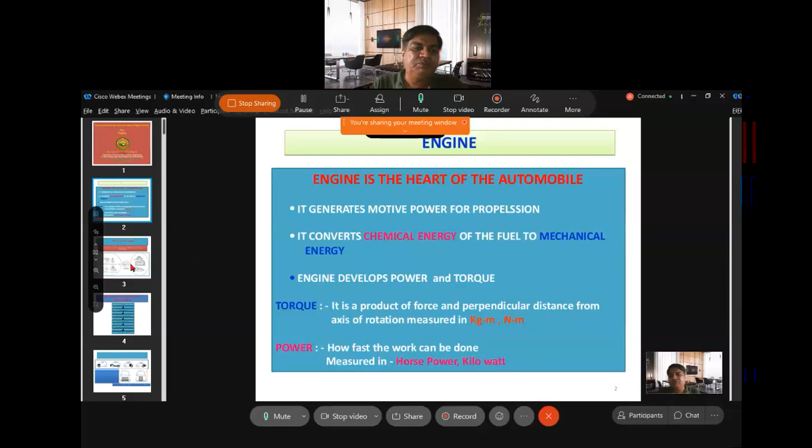Now, what is an engine? Engine is a device that runs on its own by changing energy from a natural source, such as fire, wind, or electrical material, into mechanical energy continuously.

So basically input energy is provided to the engine, and correspondingly you get output energy. Input energy may be electric power - now electric vehicles are coming into the market, which convert electrical energy into mechanical energy, and the vehicle moves forward. Similarly, fuel energy, water, and wind energy are also conventional sources, and all these will be converted to mechanical energy with the help of the engine. That is the important part.

Next is the flow diagram of how the engine produces power. How does the engine produce power? It will take fuel - fuel may be wind, water, CNG, LPG, diesel, or petrol - and combustion will take place inside the engine cylinder.

Fuel will burn and heat will generate. When heat generates, then pressure as well as temperature both develop, and there is expansion of gases. Expansion means it applies thrust on the piston, and pressure generates. All this burning takes place inside the clearance volume, defined as cc, cubic centimeter.

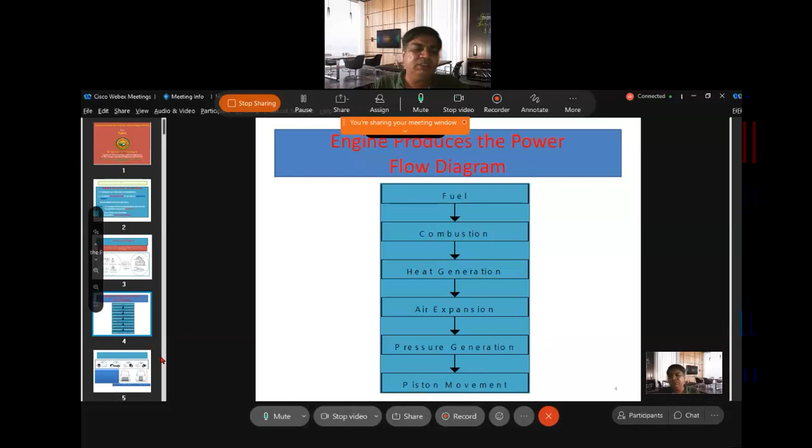Because of the burning gases, it applies thrust, meaning normal force acting on the piston, and the piston moves in to-and-fro motion, that is TDC to BDC, top dead center to bottom dead center. The piston is attached to the connecting rod, and the connecting rod is attached to the crankshaft, and correspondingly the reciprocating motion of the piston converts to the rotary motion of the crankshaft. This is how power is generated by the engine.

Now, engine layout - this is the layout of where we put the engine in the vehicle. It may be front engine, front drive, where the engine is at the front of the vehicle and power is given to the front wheels. Front engine, rear drive means the engine is at the front, and power is given only to the rear wheels, not the front wheels.

Midship engine, rear drive means the engine is in the middle and power is given to the rear wheels only. Rear engine, rear drive means the engine is at the rear and power is given to the rear drive. So the engine may be mounted lengthwise or breadthwise.

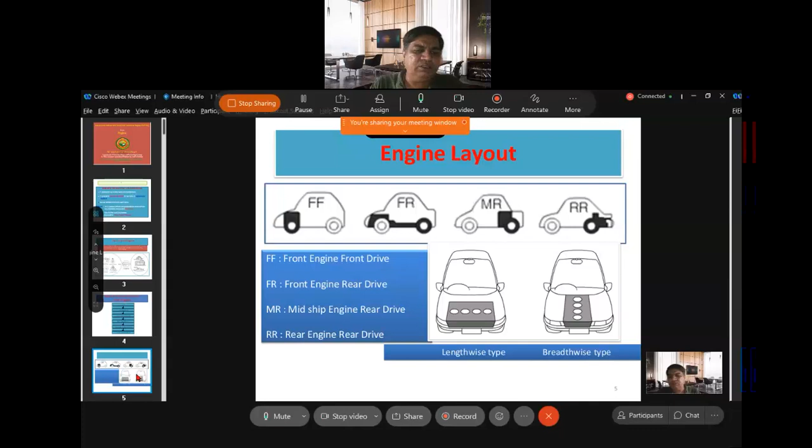Next, you see the classification of engine based on construction. Let's see how we can classify the engine.

That is the two-stroke engine. In one revolution, that is TDC to BDC as well as BDC to TDC, one power stroke will be generated. In a two-stroke engine, one stroke means the piston moves from BDC to TDC, bottom dead center to top dead center, and top dead center to bottom dead center.

All the four strokes of the four-stroke engine, that is suction stroke, compression stroke, power stroke and exhaust stroke, are covered within just two strokes in a two-stroke engine.

So theoretically the power developed by the two-stroke engine is about twice that of the four-stroke engine, but practically the power developed by the two-stroke engine is only 1.5 times that of the four-stroke engine. This is the classification based on construction of the engine.

Second is based on ignition. Ignition means how we ignite the air-fuel mixture. It may be a spark ignition engine, where we provide a spark plug. You must have seen in two-wheelers also a spark plug is provided. The air-fuel mixture goes to the engine cylinder, and at the time of ignition we provide the spark, so the burning of the air-fuel mixture takes place with the help of the spark plug.

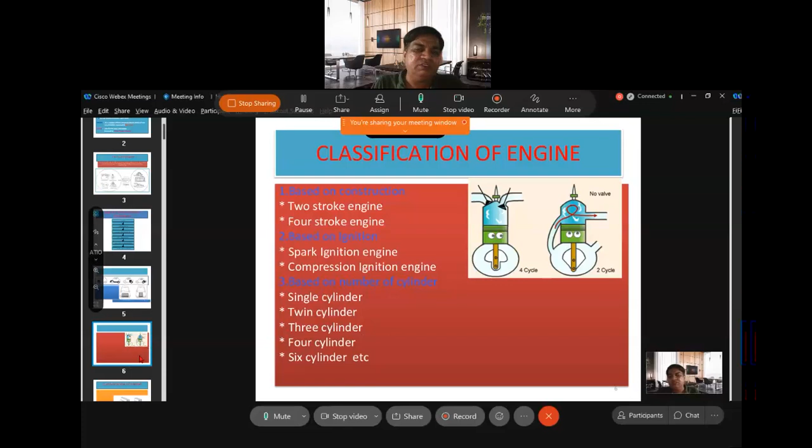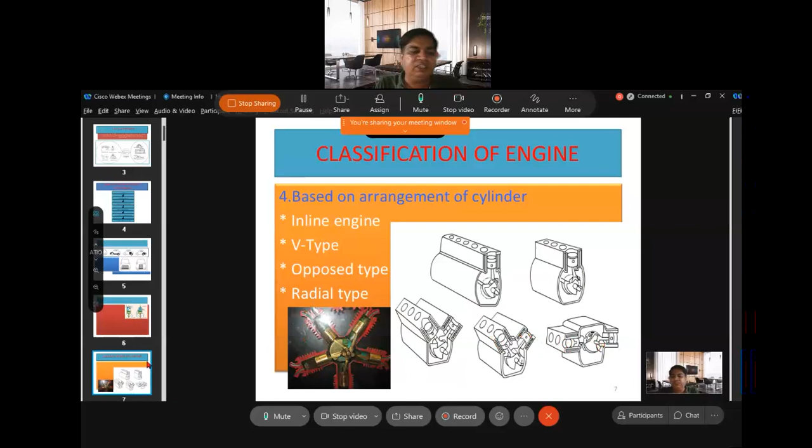Based on the fuel used, engines are classified as petrol engine, diesel engine, and gas engine. The petrol engine is called a spark ignition engine, the diesel engine is called a compression ignition engine, and the gas engine is classified based on the fuel used.

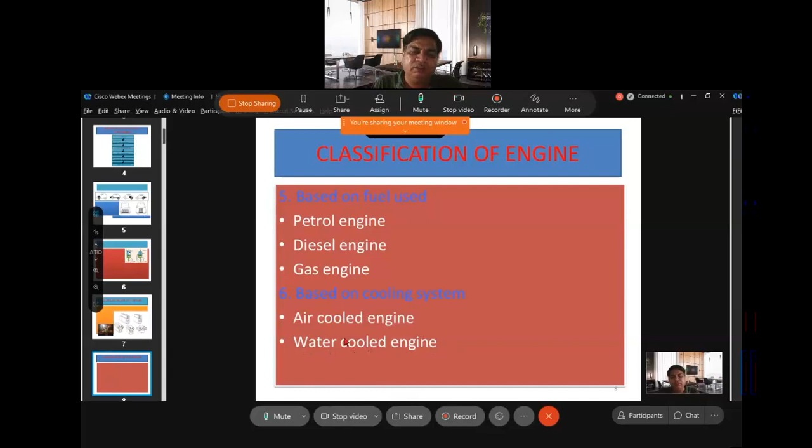Based on the cooling system, engines are classified as air cooled engine and water cooled engine. Air cooled engines are used in desert areas, and water cooled engines are used in other areas. So this is the classification of the engine.

Classification of engine based on the number of valves: valves used in each cylinder, usually two valves per cylinder, an inlet valve and an exhaust or outlet valve. These are the two valves generally found in each cylinder. The inlet valve is from which air is sucked in, and the outlet valve is from which the burnt gases come out, called the exhaust valve. Recent designs use three or four valves per cylinder.

Three or four valves per cylinder: two inlet valves, two outlet valves can be used so that more suction happens and more remaining gases come out from the cylinder. As for the type of valve arrangement, usually we use the overhead valve rather than side valve. The valve can be arranged to the side, or it can be arranged overhead of the cylinder. So this is the classification.

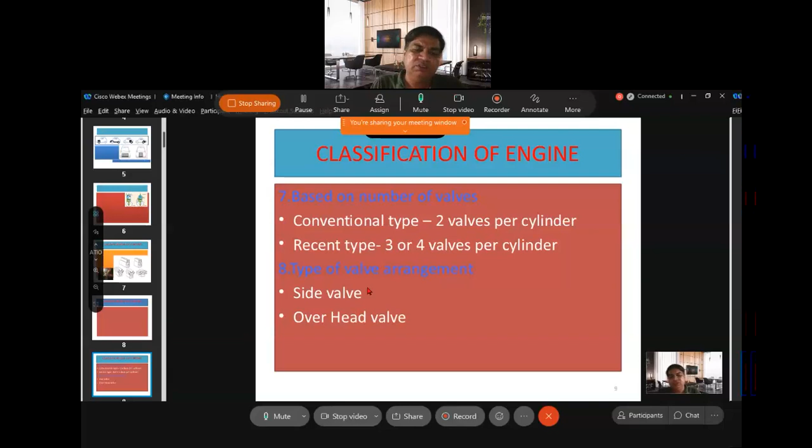Now we come to the classification of engines, basically on the basis of the type of ignition. Conventionally, we use two types of engines nowadays: compression ignition engine and spark ignition engine. Compression ignition engine is called diesel engine, and spark ignition engine includes LPG, CNG, and petrol engines.

Compression ignition engine basically uses diesel engine. By the heat of compression, the burning of fuel takes place. It uses diesel as fuel, and combustion is initiated by the heat on its own. This means when the air is heated, at the time we inject the fuel, the burning of the fuel takes place like this.

Spark ignition engine basically includes petrol engine, LPG engine, and CNG engine. All three engines provide a spark for the burning of the air-fuel mixture, so the spark is provided at the time of ignition. These engines use leaded or unleaded petrol, alcohol, LPG, or CNG as input, and combustion is initiated by the spark from the spark plug. The spark plug has a gap, and from this gap we get the spark, which burns the air-fuel mixture.

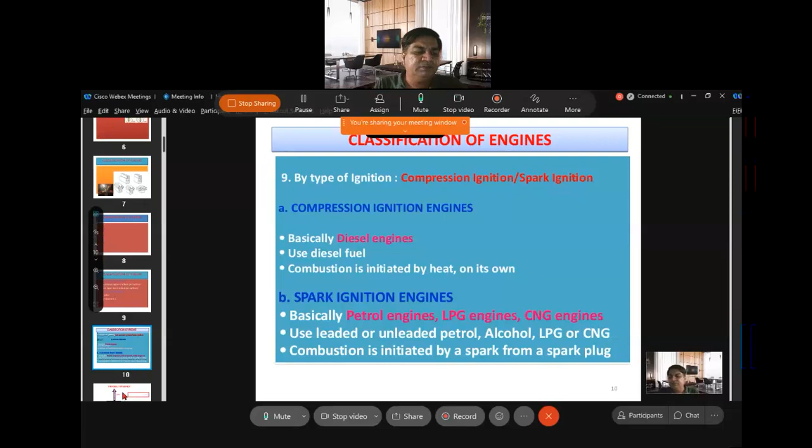Next is thermal efficiency. When we talk about the efficiency of an engine, we mean thermal efficiency - the efficiency you are getting for the output work. Thermal efficiency means if you put in 100% fuel, what is the output that moves the vehicle forward? Only 33% efficiency of the engine means...

67% of the power will be lost, mainly in cooling. At the time of compression, the temperature increases a lot, to around 800 degrees Celsius. At the time of ignition, the temperature goes up to about 1400 degrees Celsius. At this temperature, metals like chromium or nickel with melting points of 1400 or 1600 degrees Celsius cannot survive. That's why cooling is required.

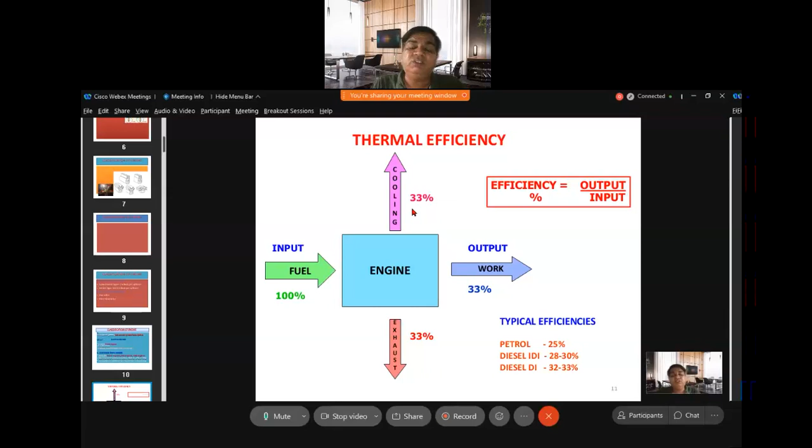That's why cooling is required - the power will be lost in cooling. How much power is lost in cooling? About 33% power is lost, because we want to run the engine up to 80 to 100 degrees Celsius. That is called the economical zone. If you increase the temperature too much, there is loss of power, so 33% power is lost in cooling. So cooling is required

for all types of engines, either air cooled or water cooled. Water is generally used as coolant because its specific heat is highest compared to other coolants. In air cooled engines, fins area is increased so that air comes in touch with the engine and cools it.

So 33% power is lost in cooling, and 33% power is lost in exhaust - very high temperature burning gases come out through the exhaust valve. In this way, 33% power is lost, only 33% power is shared, only 33% power is utilized for output work. We are wasting 67% power and getting only 33% power for useful work. This is called thermal efficiency.

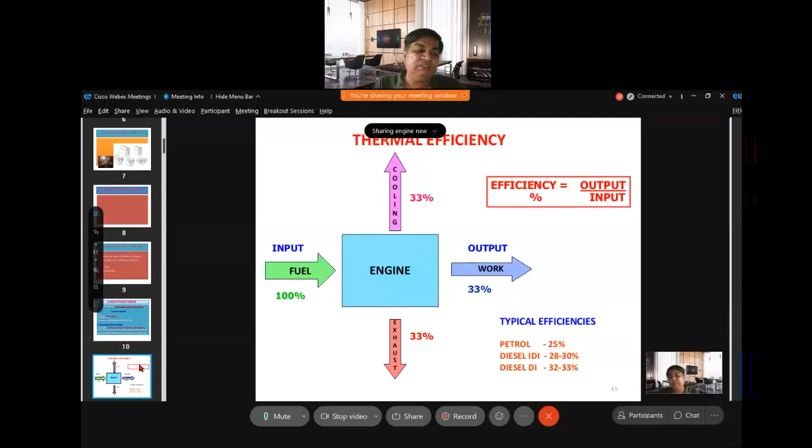In diesel engine, air will be compressed, and at this time of compression, we will provide the diesel fuel in the form of spray, and then burning of the fuel takes place because of this. And this is basically the movement of the piston, that is called stroke.

Top dead center to bottom dead center is called a stroke. When the piston moves from TDC to BDC, that is one stroke, and BDC to TDC is called another stroke. So one stroke is from TDC to BDC, another stroke is from BDC to TDC. BDC means bottom dead center, TDC means top dead center.

So that is the bore. Bore is the effective diameter, the diameter you see here. The cylinder liner is there also, and rings are also provided. The actual diameter is more, but the effective diameter in which the piston can move is called bore.

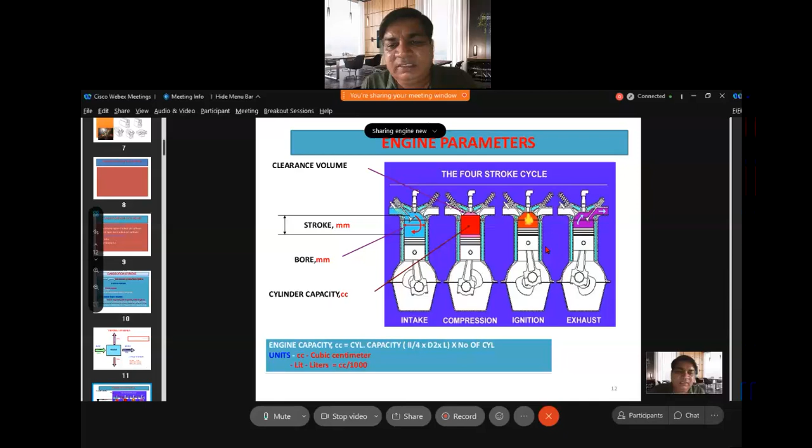But in petrol engine, we provide the spark, with the help of a spark plug at the time of ignition, then the burning of the fuel takes place. So here the compression ratio is very high in the diesel engine, and the compression ratio is smaller in the petrol engine.

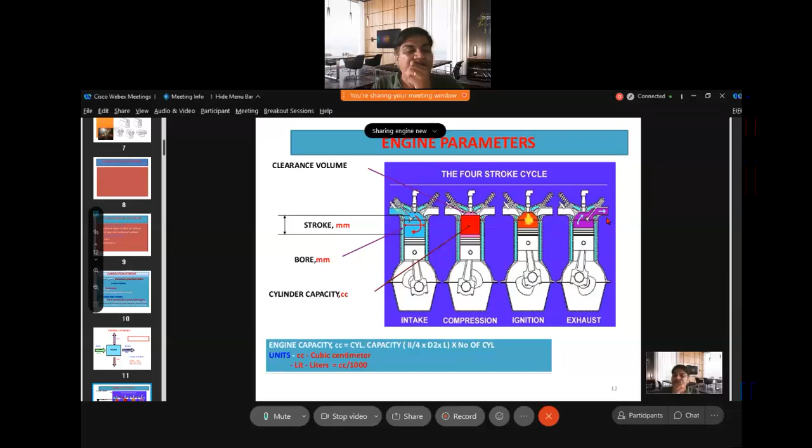Then again, the piston will move from BDC to TDC, and whatever gases are there will come out through the exhaust part. The burning gases will come out, and that's why whenever you put your leg on the silencer, there are chances of burning and damage to your leg. That's why the silencer is made of a special type of material, so that at very high temperature the metal cannot melt.

These are basically the engine parameters. What is bore? Bore is the diameter of the cylinder, the effective diameter, we can say. Stroke is the distance between the topmost point of the piston travel to the bottommost point. That is called stroke. Bore and stroke are both in millimeter, and we can convert into meter as well as centimeter also.

Capacity, also called displacement, is the volume displaced by the piston while moving from top to bottom, indicated in liters. That is the capacity of the engine, pi by 4 d square into L, where L means the stroke. Clearance volume is the volume available above the piston, where the burning of the fuel takes place. That's called clearance volume, and it is defined in CC.

More CC, more power. Capacity examples: 100 cc bike, 125 cc bike, 150 cc bike, 200 cc bike, 250 cc bike. In cars also, you can say 800 cc engine, 1200 cc engine, 1600 cc engine, and so on. Means more cc, more power. CC means cubic centimeter. So if capacity is more, power is more; if capacity is less, power is less.

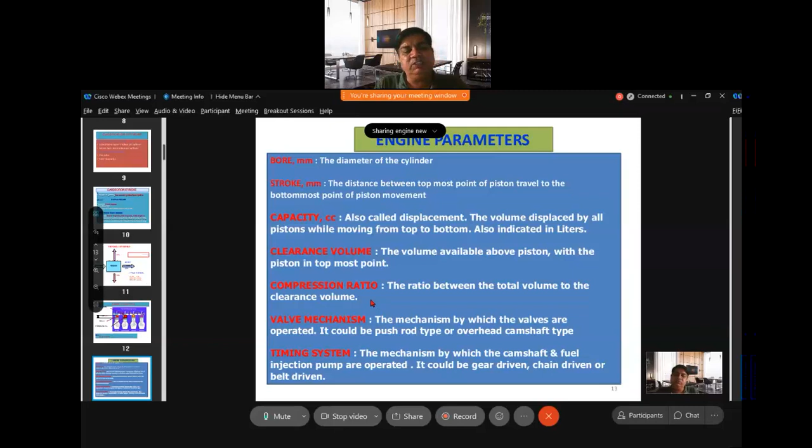Compression ratio is the ratio of the total volume of the cylinder to the clearance volume. That ratio is called compression ratio. Compression ratio in petrol is less than diesel. Petrol varies from 4 is to 1 to 10 is to 1, but in diesel it varies from 14 is to 1 to 20 is to 1. That is called compression ratio.

Valve mechanism you will find in diesel engine. Opening and closing of the valve is done with the help of camshaft, and timing gear also provided on the flywheel, which helps open and close the valve. It could be push rod type or overhead camshaft type valve, so that inlet valve and exhaust valve can be closed or open at different times.

Timing system is the mechanism by which camshaft and fuel injection pump are driven. That timing system could be gear driven, chain driven, or belt driven.

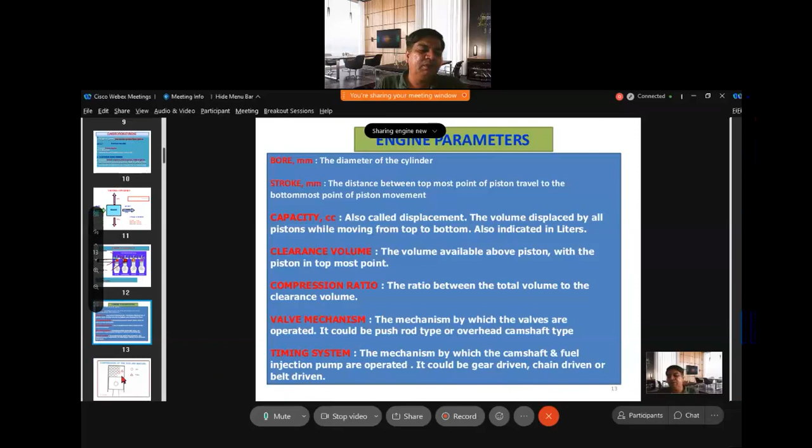That is the compression of the fuel air mixture. You see 1, 2, 3, 4, 8, 12, 15 — 15 parts of air and 1 part of fuel. That is the chemically correct air fuel mixture that should be there in petrol as well as diesel engine.

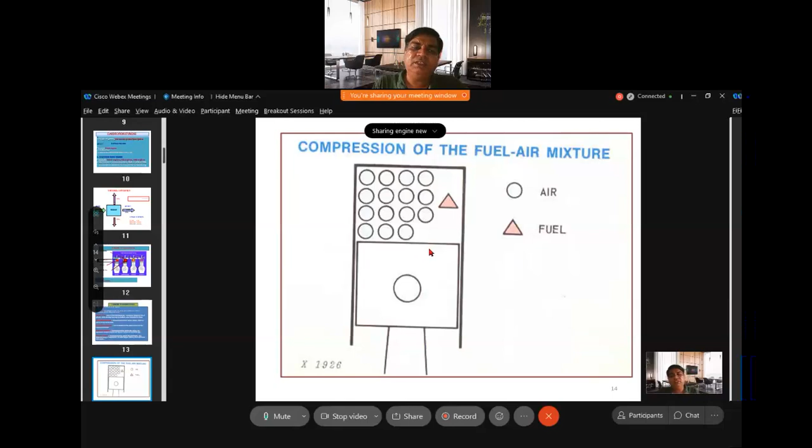When the mixture is less than 15 is to 1, say 5 is to 1, then we can say it is a rich mixture. When it is more than 15 is to 1, that is called a lean mixture. So the chemically correct air fuel mixture is 15 is to 1.

Compression ratio: the piston is there, 8 parts of air is there, and it is compressed into a small part, so it gets heated a lot. At this time, either the spark plug or fuel injection pump will provide the fuel, then burning of the fuel takes place. That is the concept of compression ratio. You are compressing the 8 parts into 1 part, then heating of the air fuel mixture takes place.

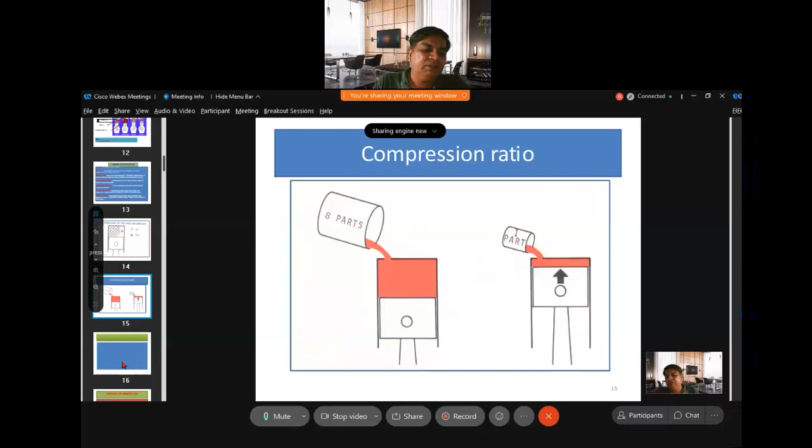Next is the top dead center. It refers to the position of the crankshaft when the piston is at its topmost position, closest to the cylinder head — that is the TDC, top dead center. The position of the crankshaft when the piston is at its lowest position, farthest from the cylinder head, is the bottom dead center. The difference between the TDC and BDC is called the stroke.

Engine parameters: IHP means indicated horsepower. Indicated horsepower means the power developed inside the engine cylinder is called IHP.

So BHP is the power which is available. FHP is friction horsepower — the difference between the IHP and BHP is called FHP, friction horsepower.

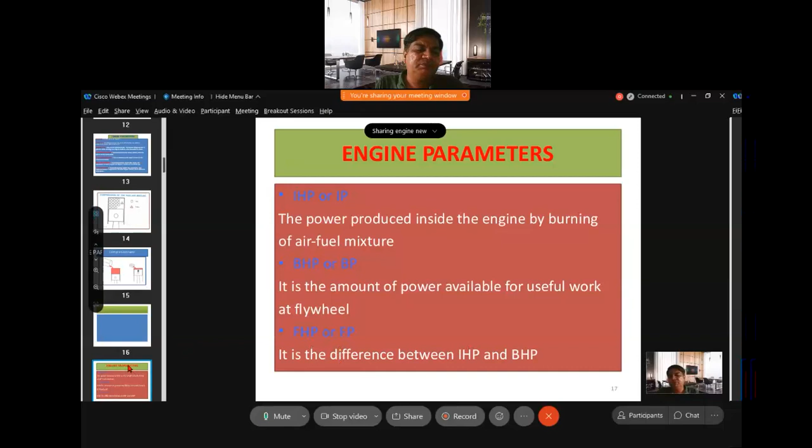This is the diesel engine or compression ignition engine, using diesel fuel. Diesel engines are classified into two types: direct injection and indirect injection. Direct injection engine is better than indirect injection engine because it is highly fuel efficient — when burning of the fuel starts, it proceeds in the forward direction, so we save a lot of fuel in direct injection engines.

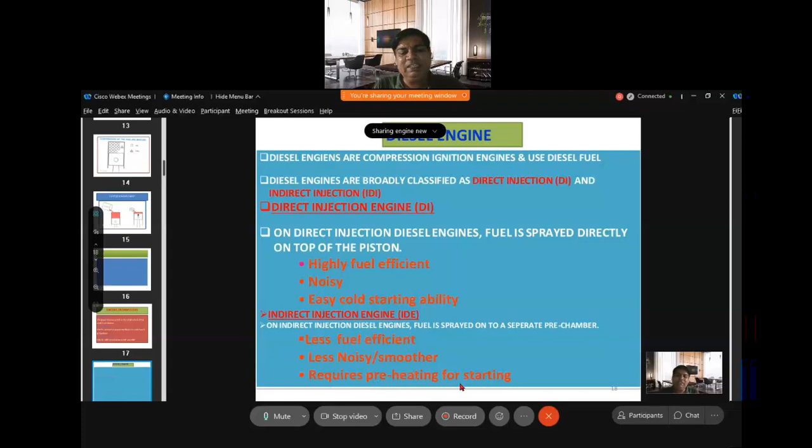Direct injection engines are noisier, but have easy cold starting ability. Indirect injection engines are less fuel efficient because there is a separate chamber where burning of the fuel takes place, but they are less noisy and smoother since the burning fuel goes into another chamber. They require preheating for starting because there is a separate chamber where burning occurs.

Petrol engines are spark ignition engines that use gasoline, CNG, or LPG. There is a device used in petrol engines called a carburetor, where the air-fuel mixture is mixed. Carburation means mixing of the air-fuel mixture, and this mixture then goes to the engine cylinder. That is a carbureted engine.

In a carbureted engine, petrol and air are mixed in the carburetor before being sent into the engine. In a fuel injected engine, the petrol is injected separately, and the petrol and air are mixed inside the cylinder. Air comes from the air cleaner, and petrol comes from the tank and fuel filters, and both are mixed in the carburetor.

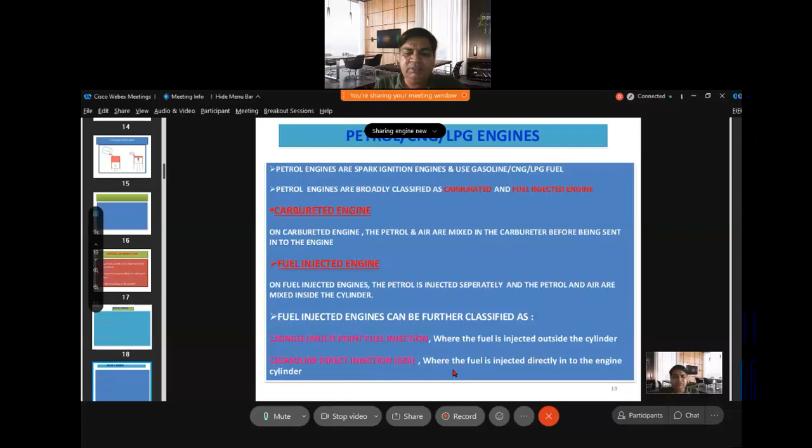Fuel injected engines can be further classified as single or multi-point fuel injection, where the fuel is injected outside the cylinder. Gasoline direct injection means the fuel is injected directly into the engine cylinder. This is the way injection of the petrol takes place.

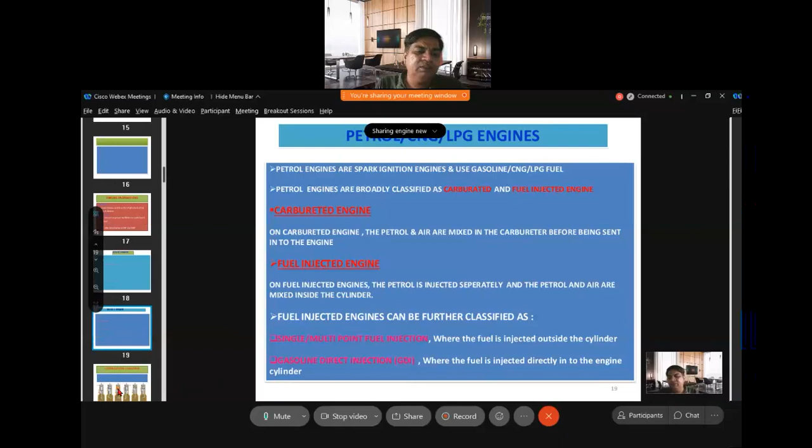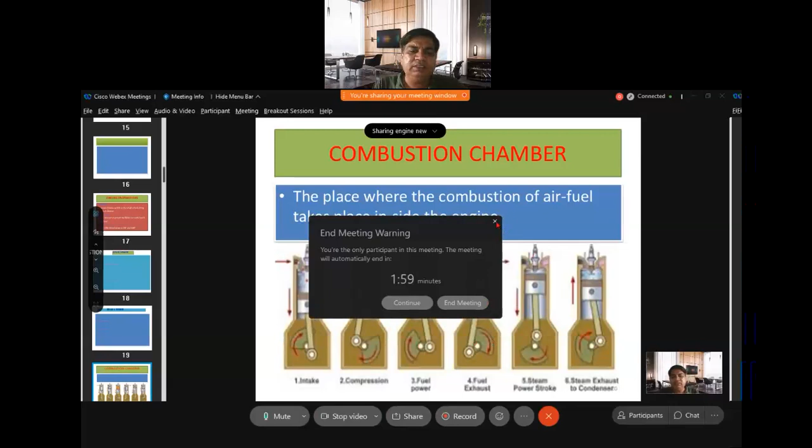This is the view of the intake, compression, fuel, and exhaust. This is the view showing how the piston moves from TDC to BDC, and this is the compression and power stroke concept.

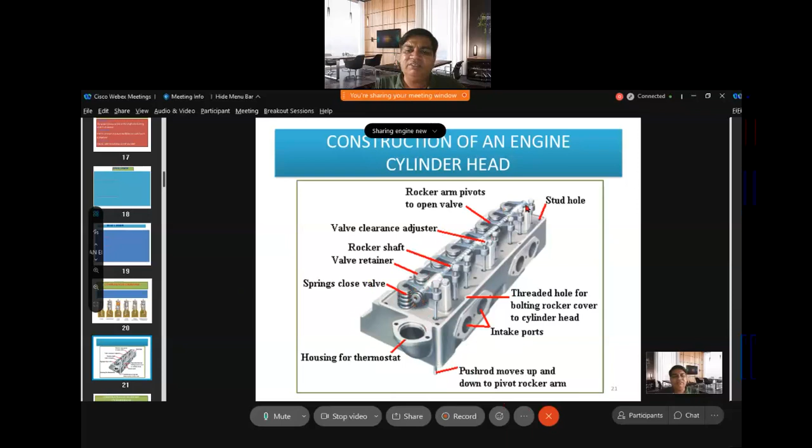This is the construction of the engine cylinder. There is a housing for the thermostat valve to maintain temperature, and a spring concept as well. This is a rocker arm, which controls the opening and closing of the intake ports. This is the situation by which both the inlet valve and outlet valve operate, with the valve retainer. This is the view of the cylinder head.

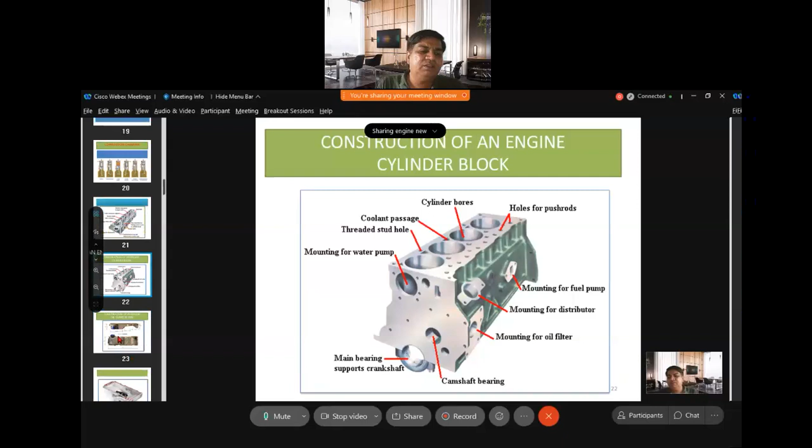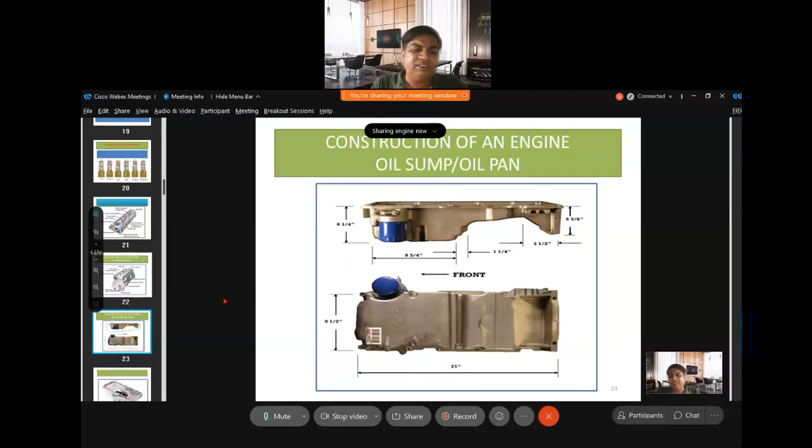This is the construction of the engine where oil is filled and served, or thrown to the engine via a gear pump. The oil is filled here, and with the gear pump, the oil goes to the engine, where lubrication of different parts takes place. This is the construction of the oil sump, where oil can be filled, and the gear pump is also used for this purpose.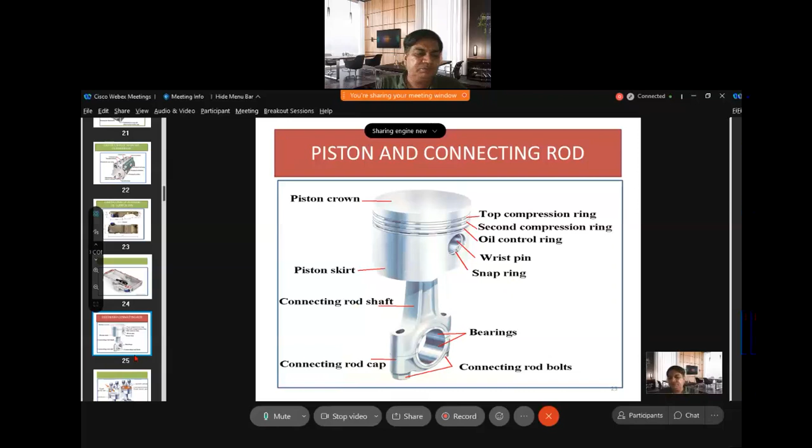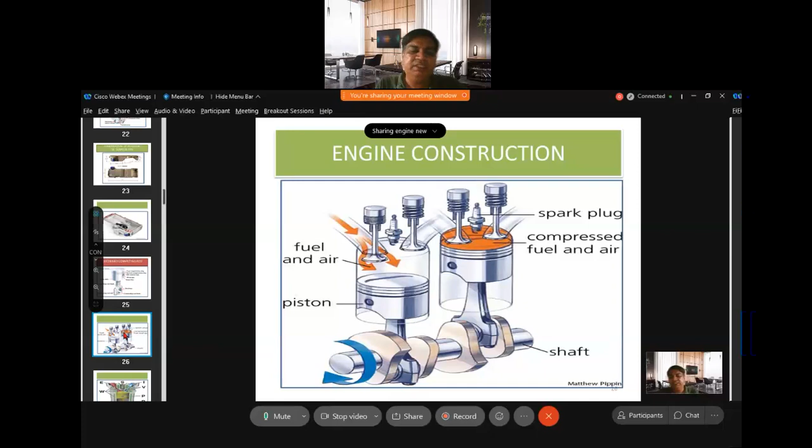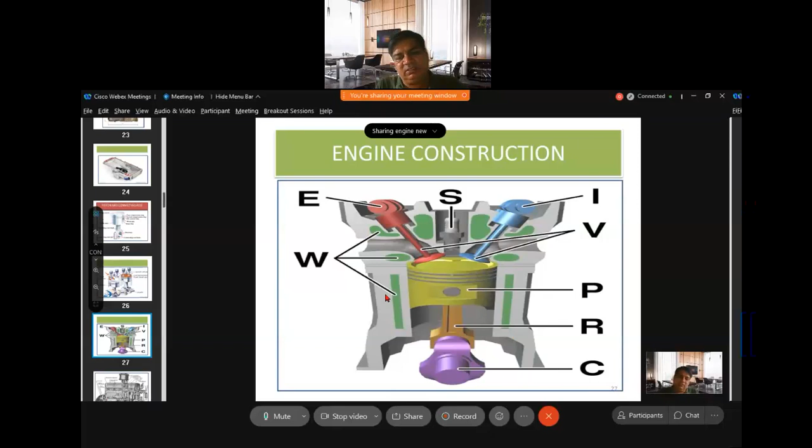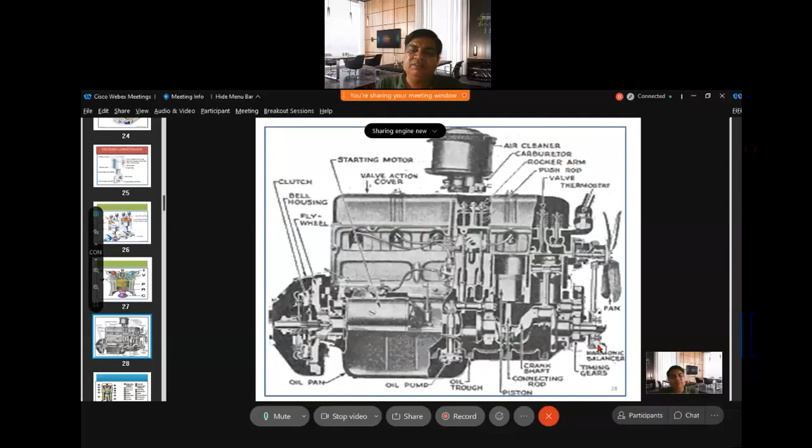This is also another view, a more complicated view. We can say the different parts are assembled and the complete engine is formed this way. This is the engine construction.

Here is how the valve, piston, connecting rod, and crankshaft work together. These are the top compression ring, second compression ring, and the third one is the oil rings. This is the rocker arm, opening and closing, and the valve spring is there also. These are attached with the push rod, and then it connects to the crankshaft also.

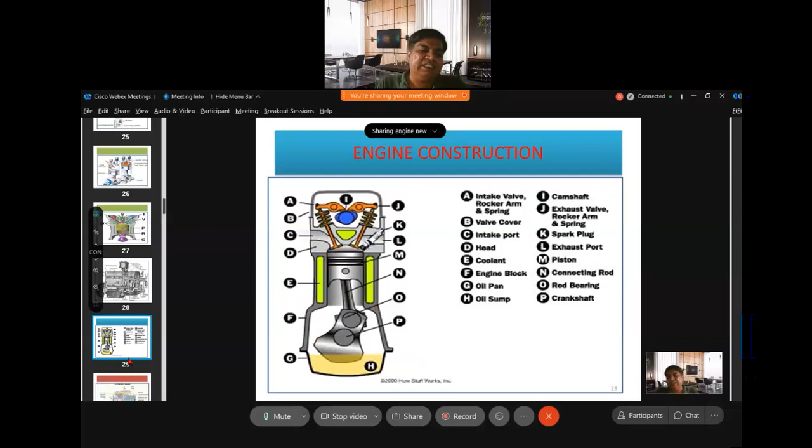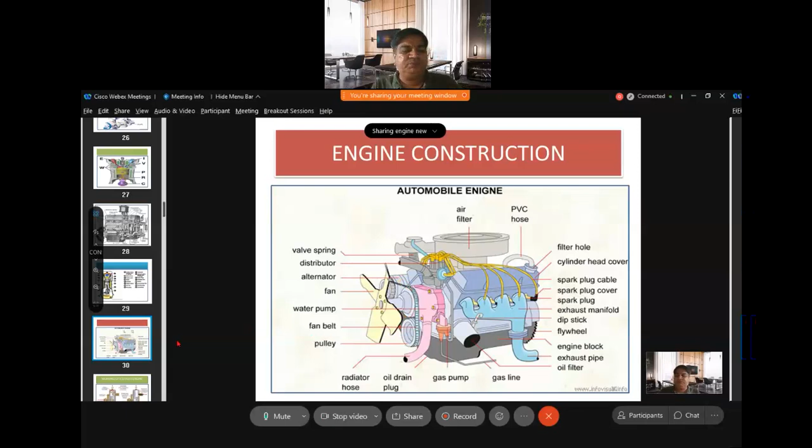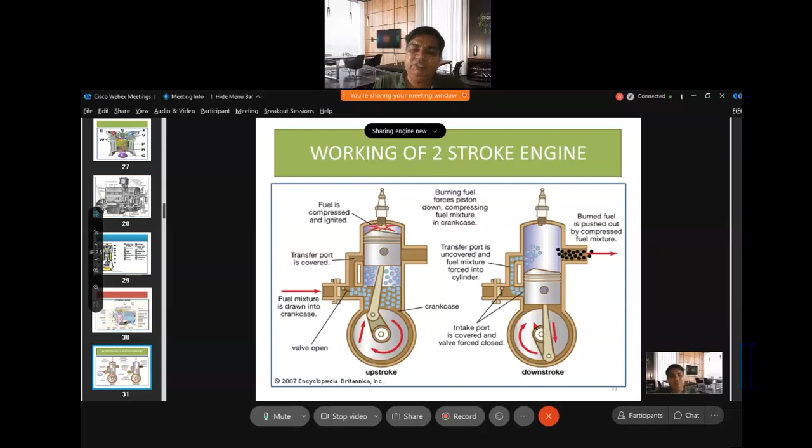You see the working of the two-stroke engine. There is the up stroke and the down stroke. In two-stroke, basically the power stroke. In one stroke, basically suction and compression happen. The other is power and exhaust also. Here we provide a port instead of the valve, and spark is provided. Usually the two-stroke engine is a petrol engine, not a diesel engine. So we can say in the two-stroke engine, it's a spark ignition engine, and all four strokes will be completed in one revolution of the crankshaft. This is the working of the two-stroke engine.

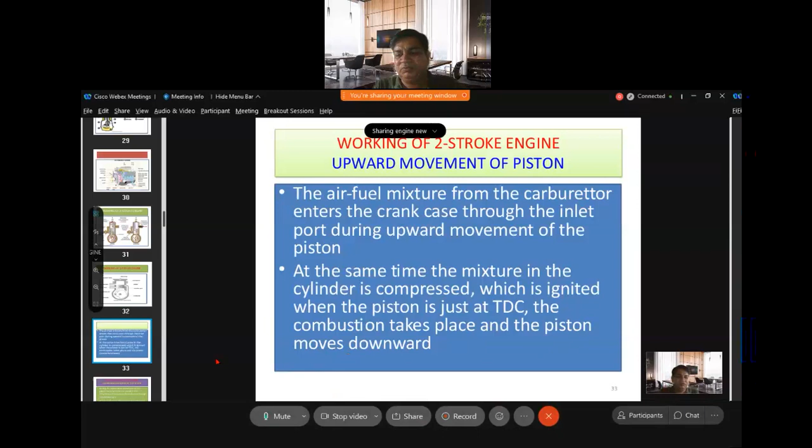Upward movement of the piston: the air mixture from the carburetor enters the crankcase through the inlet port during upward movement of the piston. At the same time, the mixture in the cylinder is compressed, which is ignited when the piston is just at TDC. Combustion takes place and the piston moves in the downward direction. Downward motion also: downward movement of the piston compresses the mixture in the crankcase and pushes it into the cylinder through the transfer port. This cycle operation is completed in one revolution of the crankshaft.

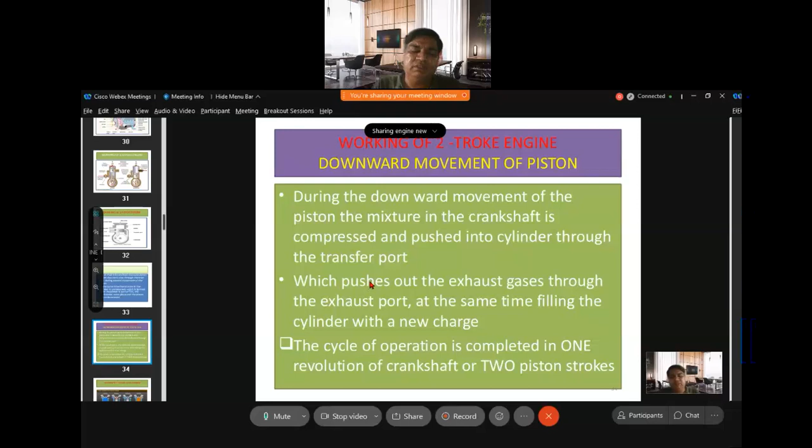There are two piston strokes: this is one, the upward movement of the piston, and the other is the downward movement of the piston.

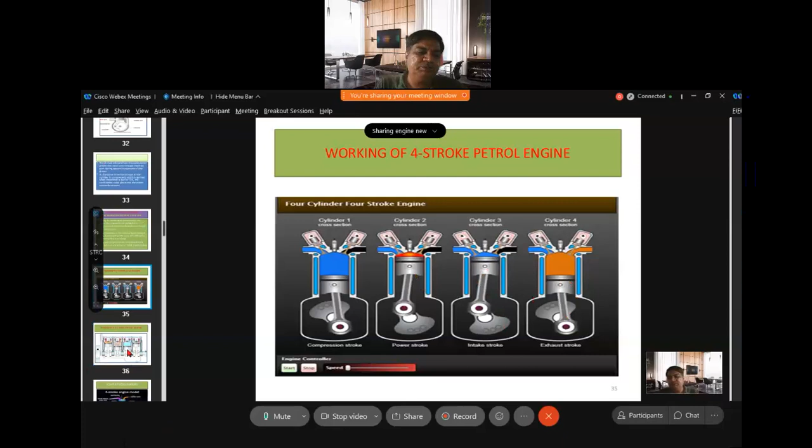And this is the working of the four-stroke engine. One, two, three, four - four-stroke engine. Basically four strokes: one suction, another compression, ignition, and as well as exhaust stroke. This is a live view of the motion of the four-stroke, four-cylinder engine.

You see the crankshaft and camshaft are both attached with the help of a chain drive or belt drive. Flywheel is attached to the crankshaft also - it stores energy and serves as one of the pressure plates for the clutch. A gear is also provided on the flywheel ring gear, which is utilized for starting the engine; the gear of the starting motor is attached with this and can be operated by this.

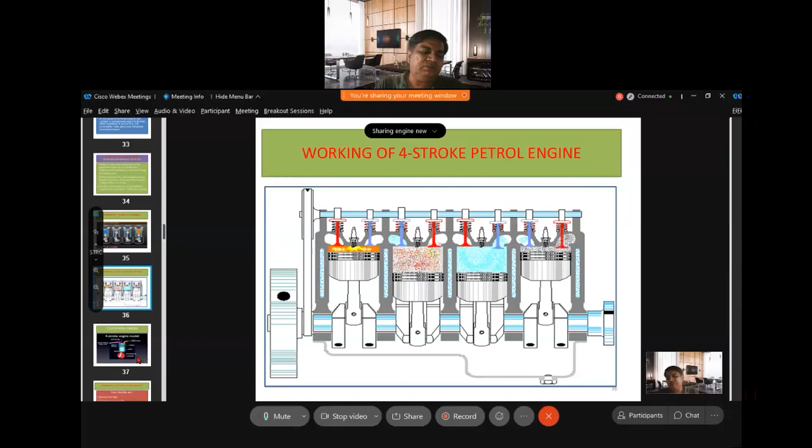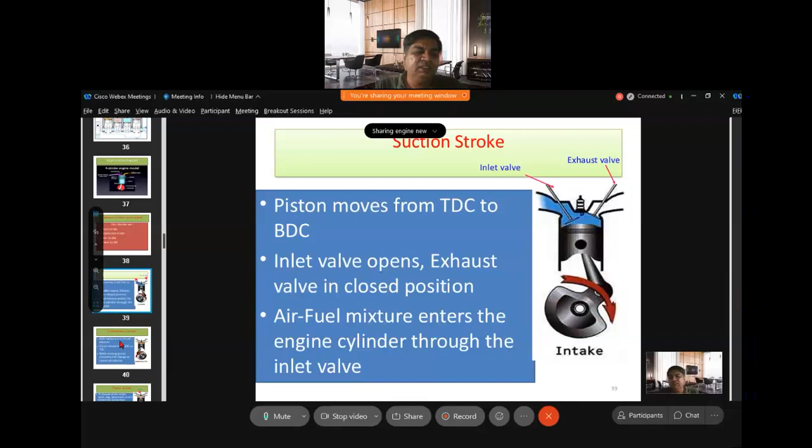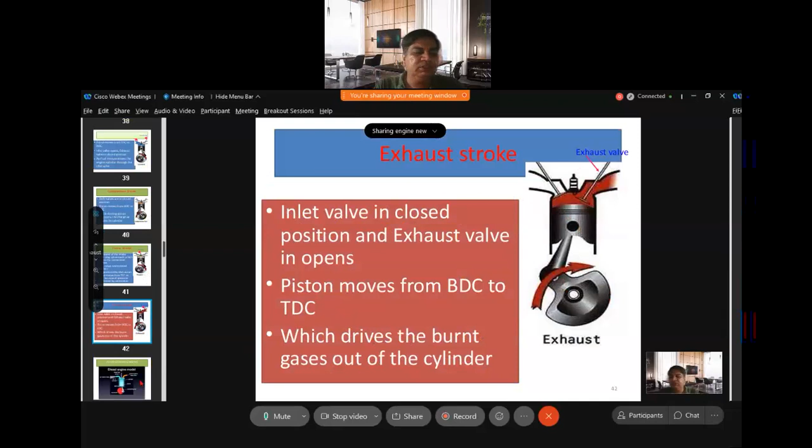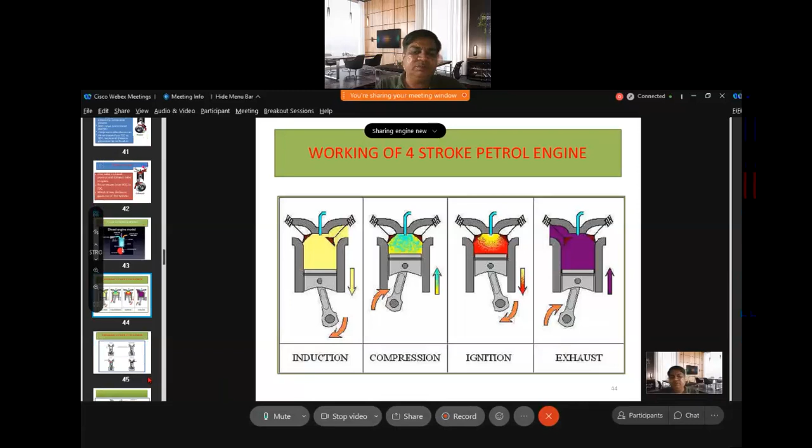This is the working of the four-stroke petrol engine, with a spark plug provided. This shows the ignition, compression, and exhaust stroke. This is the injector, which injects the fuel with its help.

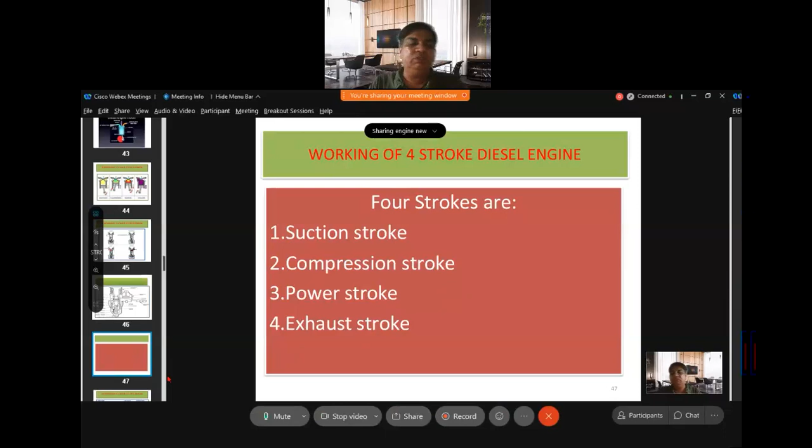This is the way the four-stroke cycle works: suction stroke, compression stroke, power stroke, exhaust stroke. As I told you, in a four-stroke engine there are four strokes - one, two, three, four.

And that is the view of the valve timing. Valve timing is the time at which the valve opens and closes, indicating when the valve starts opening and when it finishes closing. It is represented by the rotational angle of the crankshaft - as the crankshaft rotates, opening and closing of the valve is done, about the highest or lowest point of the piston as the starting point.

So the inlet valve opens 10 degrees before TDC and closes 35 to 45 degrees after BDC. Then the compression stroke starts.

During compression, both valves remain closed. During the power stroke also, both valves remain closed. During the exhaust stroke, the exhaust valve remains open after 10 degrees, up to about 25 degrees after TDC.

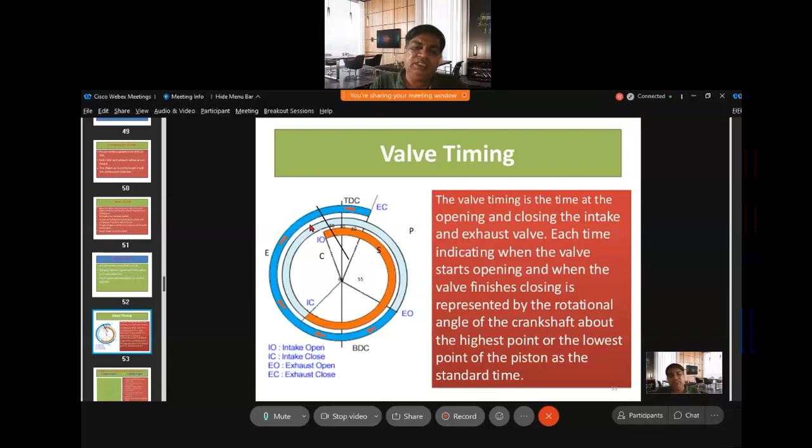So the opening and closing of the valve is indicated with the help of the valve timing diagram, which is the most important part of the engine - how much time before the valve should be opened and closed is determined with the help of this diagram.

So this is the difference between the two-stroke engine and four-stroke engine. In a two-stroke engine, the operation completes in one revolution of the crankshaft compared to two revolutions in a four-stroke. The power developed by a two-stroke engine is more than a four-stroke engine. Fuel is exhausted during the scavenging process - actually, removal of the exhaust gas is called scavenging. Fuel is not exhausted during scavenging in this sense.

Low cost compared to more cost for the other. This is the concept of this. It is used in mopeds, scooters, motorcycles, and in LMV, MMV, HMV applications.

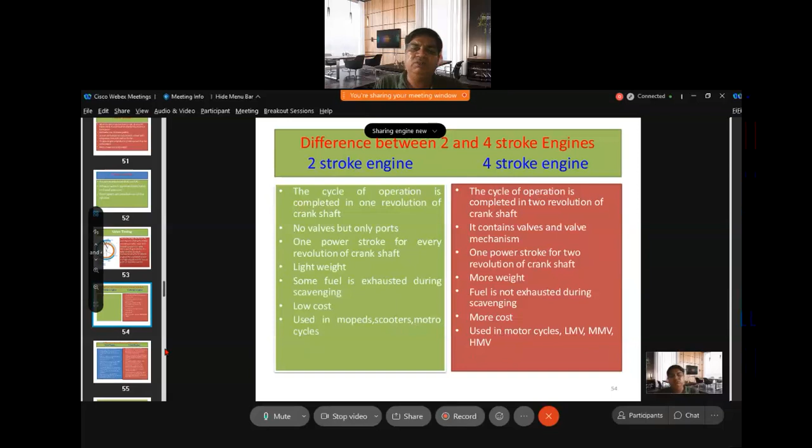Now, basically for the four-stroke engine, these are the main components of the engine. Cylinder head, as I told you - different components are attached to the cylinder head. The engine block is there also, as I already showed you in the earlier slide, along with the oil sump where oil is filled. Manifolds - inlet manifold as well as exhaust manifold - are the two manifolds we provide.

Gaskets are there also, which connect the two parts. The piston and piston rings - the piston is there along with rings: one is compression, and the third is the oil ring. The piston pin is there also, usually made of a special type of alloy steel.

From the piston pin, we attach the connecting rod also. The connecting rod, made of drop-forged steel, is usually in an I-shape for maximum moment of inertia. The crankshaft is also there, a special type of shaft made of alloy steel, and the connecting rod converts reciprocating motion into rotary motion.

Main bearings are there - the crankshaft bearing is provided, one small bearing and one big bearing. The camshaft is attached to the crankshaft, with its speed being half that of the crankshaft.

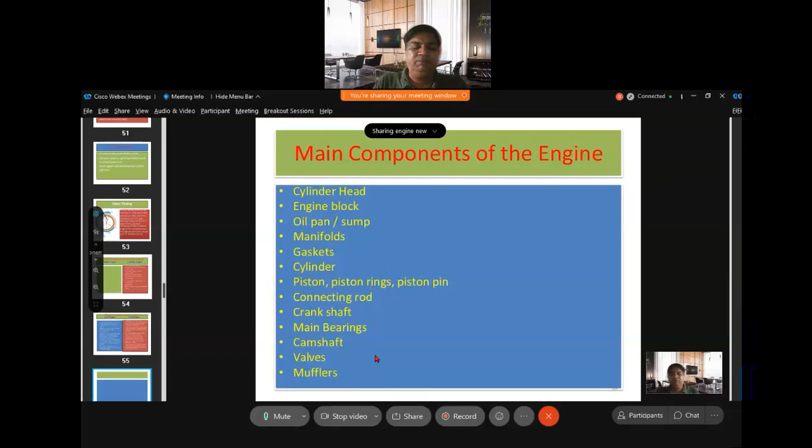Valves are provided, inlet as well as outlet valve. Mufflers are provided also, meaning a silencer is provided. So these are the main components of the engine.

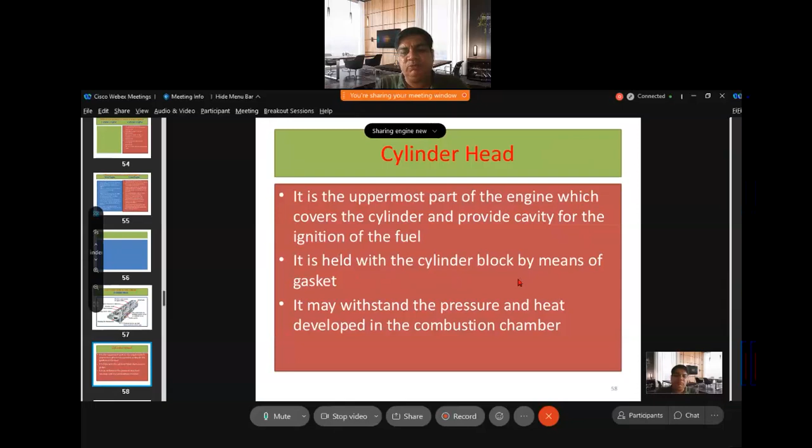This is also a view of the construction of the engine, the cylinder head, etc. This cylinder head is the uppermost part of the engine, which covers the cylinder and provides the cavity for ignition of the fuel. It is held with the cylinder block by means of a gasket.

This is basically the construction of the engine cylinder block. This is the cylinder block also, provided with different components that can be put in.

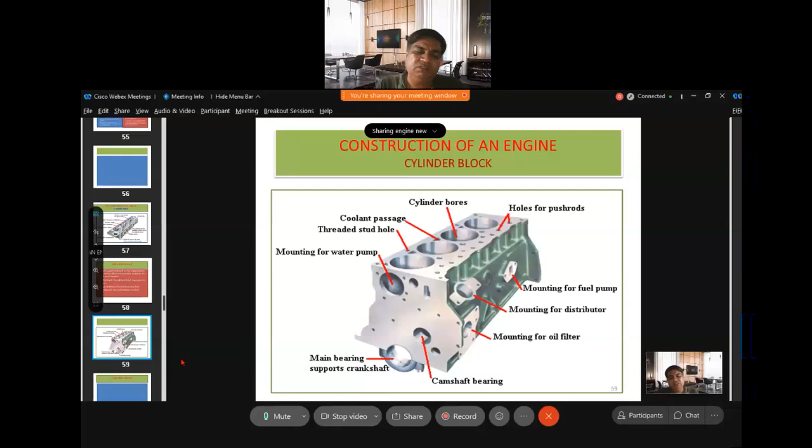This is the cylinder block, and this is the cylinder block moving part. Cylinder block moving parts include linerless, dry type liner, and wet type liners. There are different types of liners, and we put them where the piston can be moved. This is a four cylinder engine.

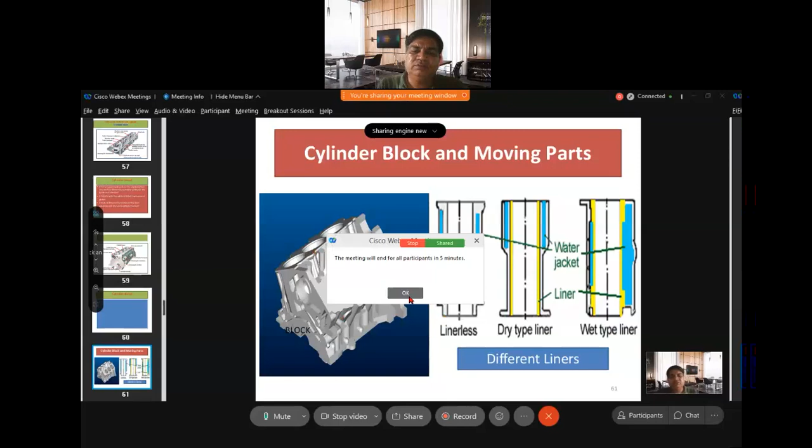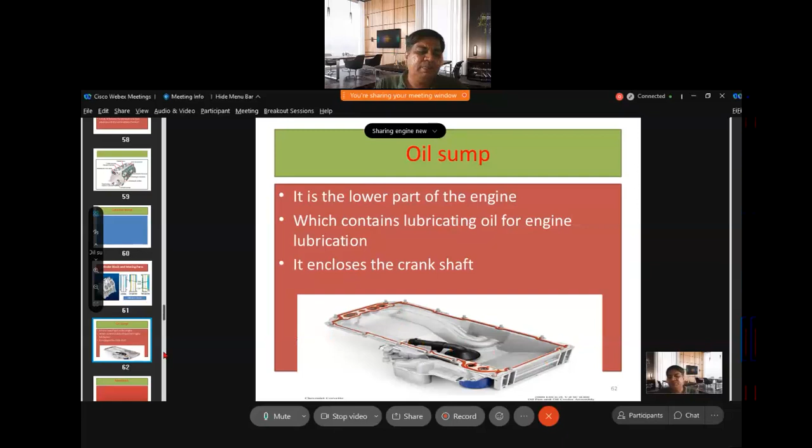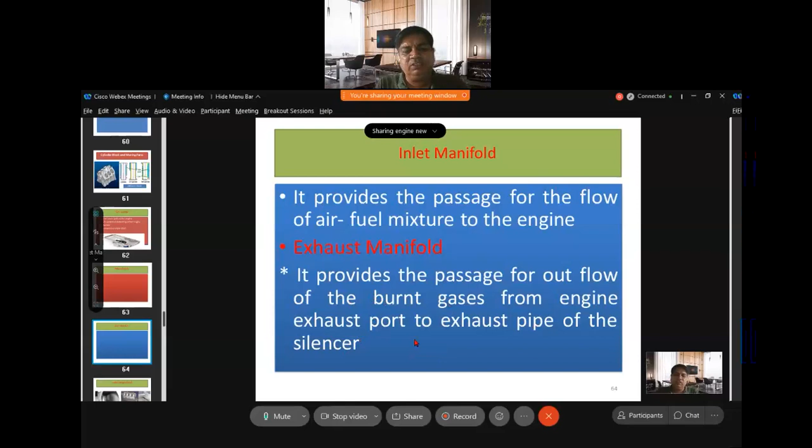Inlet manifold provides the passage for the flow of the air fuel mixture to the engine. Exhaust manifold provides the passage for the outflow of burnt gases from the engine exhaust port to the exhaust pipe and silencer, as I told you.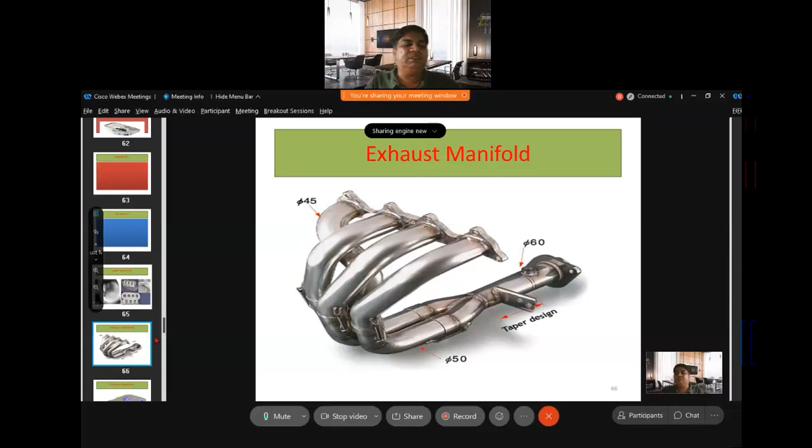This is called the silencer. The silencer is made of a special type of material so that the high temperature gases coming out cannot burn it. The exhaust manifold is attached to this. And these are the gaskets, used to provide tight fitting between two surfaces.

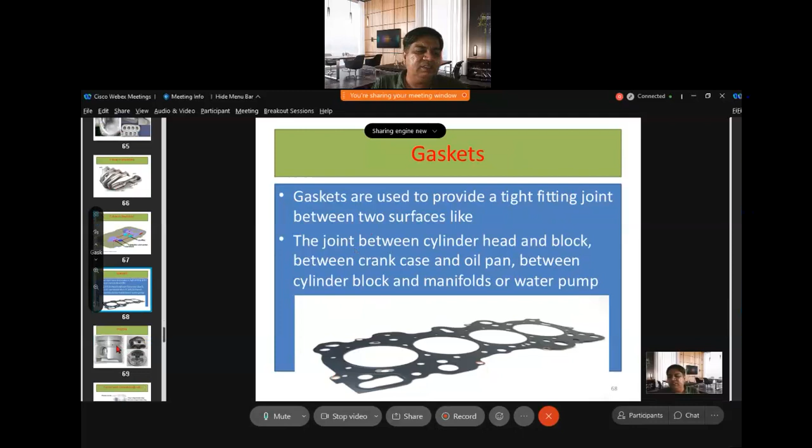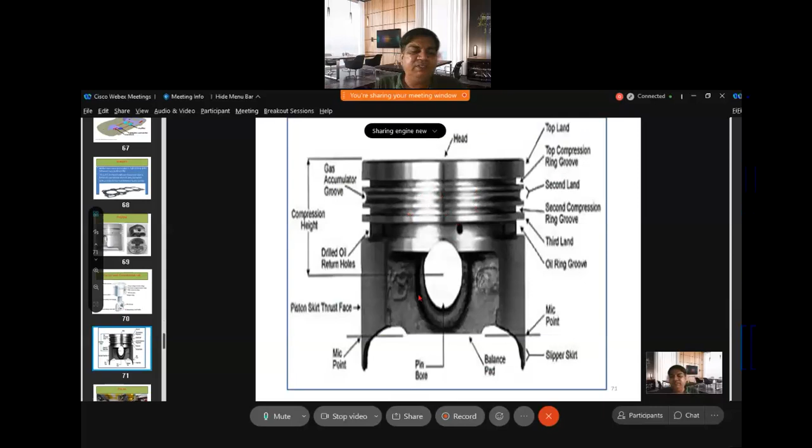This is the view of the piston, as I told you earlier, showing the piston and piston rod. Different types of rings can be attached with the help of the piston. This is another front view of the piston, along with the inlet valve and exhaust valve, all attached with this.

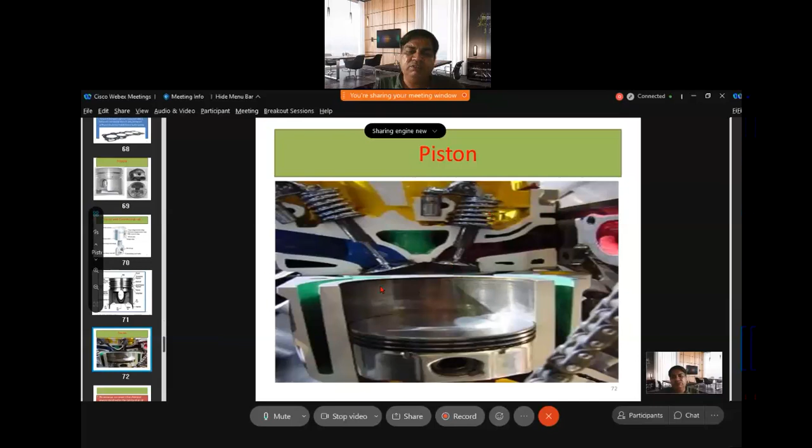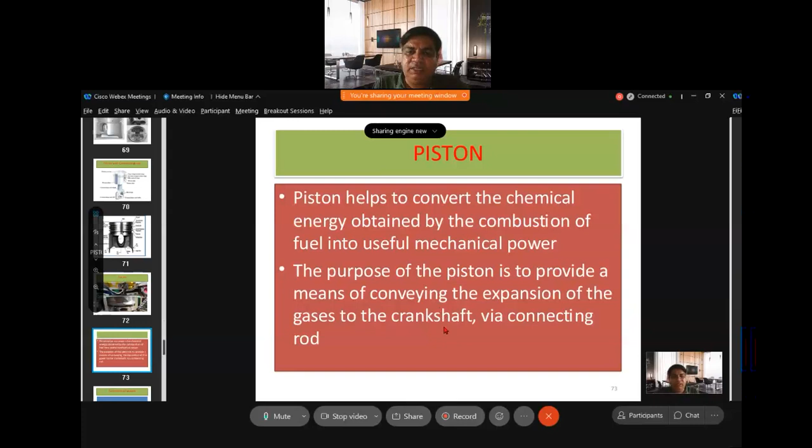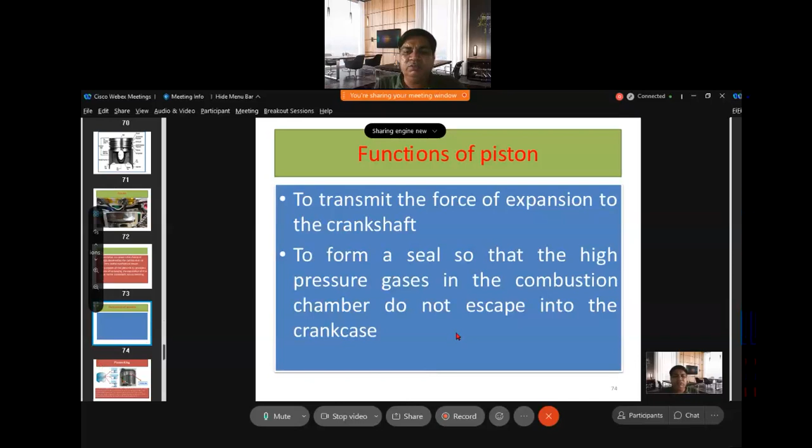The piston is made of aluminum alloy because of its low weight and high conductivity, which is good for fabrication. The function of the piston is to transfer the force of expansion to the crankshaft and to form a seal, so the high pressure gases in the combustion chamber do not escape into the crankcase.

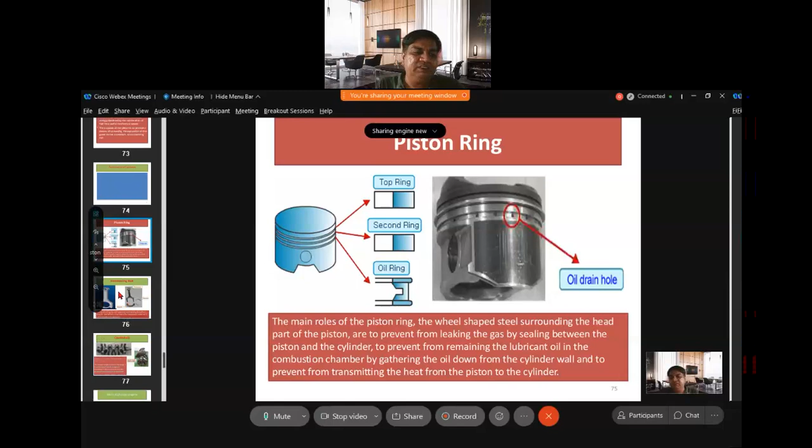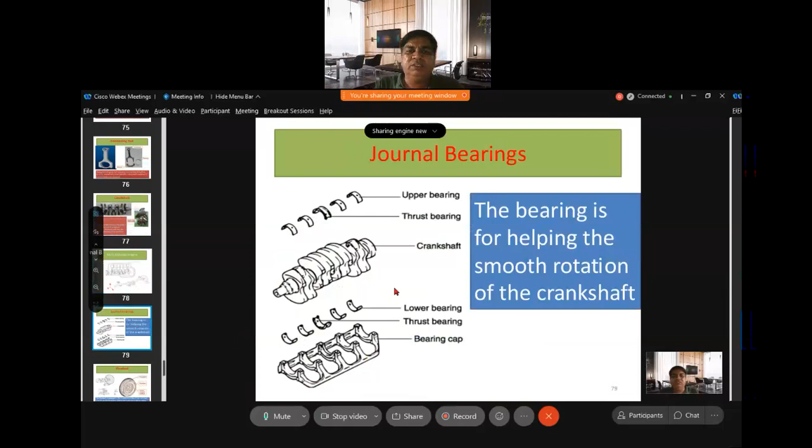These are the rings, made of a special type of material for fabrication. This is the connecting rod, made of steel. Multi-cylinder engines with one, two, three, four, or six cylinders also exist, and there are journal bearings such as upper bearing, thrust bearing, and crankshaft bearing.

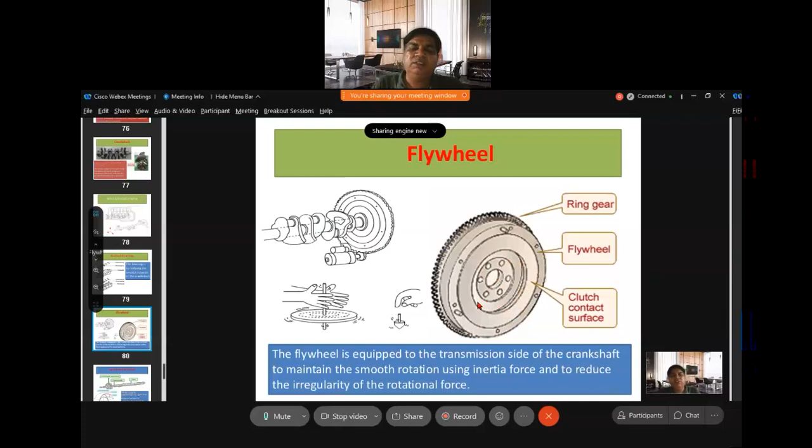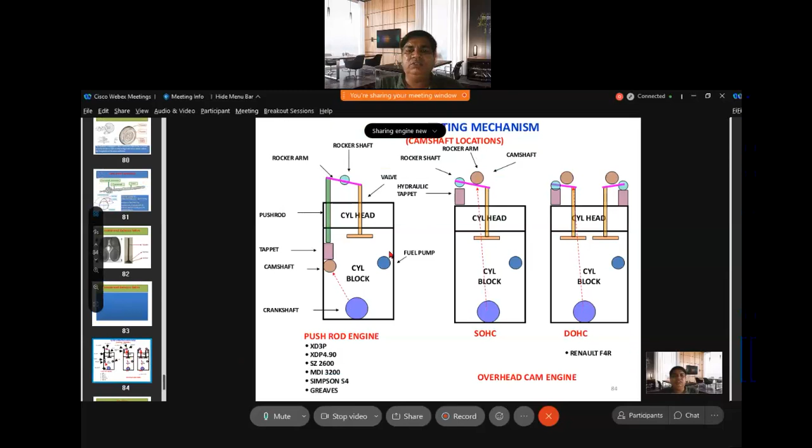This is the flywheel with a ring gear in it, one of the pressure plates along with the flywheel. This is the cam and camshaft for the opening and closing of the valve, and this is the intake and exhaust valve, showing the mechanism by which opening and closing of the valve is done.